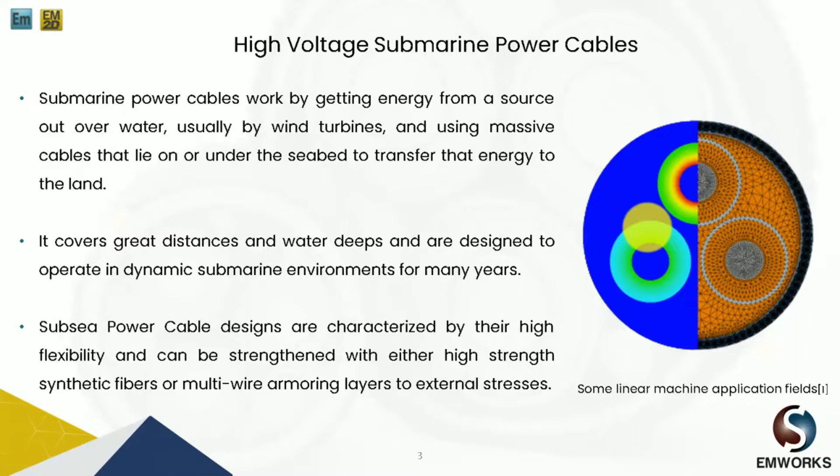Now, naturally, the application for these cables are in areas where there are some offshore activities going on. For example, oil and gas drilling, marine platforms. These cables often act as conduits to supply power to these offshore installations, and after the tsunami there have been a lot of subsea observatories installed by various governments in various parts of the oceans, and so these tsunami pre-warning systems also require electricity, and these subsea cables often carry the electricity from a nearby island.

Now, before looking at the design challenges, let us look at the structure of a subsea power cable. For example, here on the right I have a cross section of one such commonly used design for these cables. You can see that these conductors are there, in the brown color. They are the ones that carry electricity. Then these conductors are covered with lead sheath. As you can see on the screen here, these lead sheaths are basically there to block the electric field from leaving the sheet. Then we also have twisted outer armor, which is here on the outer body, which provides mechanical strength, and all of these are packaged inside XLPE, which acts as an excellent electrical insulator. So these are filled here.

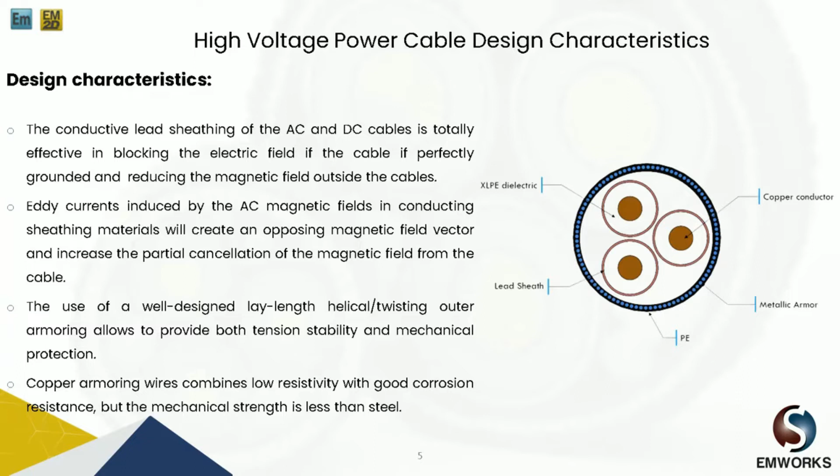So once the simulation was run, let us look at the comparison of capacitance, resistance and inductance. To begin with, we performed a capacitive analysis for a 3-phase power cable, and we calculated its analytical phase capacitance, which is around 0.166 microfarad per kilometer.

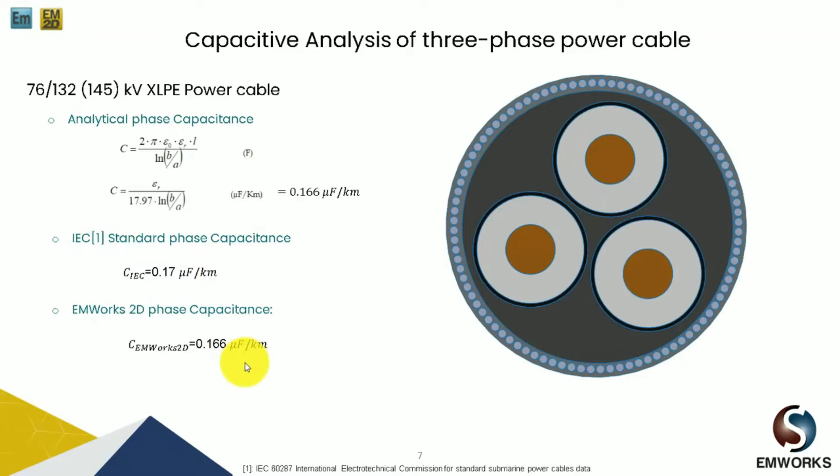We also referred to the IEC standard, and as you can see, for the software EMWorks 2D, we got around 0.166 microfarad per kilometer. Notice that the capacitance calculation coming from the simulation of the cable design conforms very well with the IEC standard.

Moving ahead, similarly we performed an inductance analysis for the 3-phase power cable. Analytically we got 0.4 millihenry per kilometer, and using our software EMWorks 2D we obtained 0.48 millihenry per kilometer, and also using another tool, that is EMS 3D, we achieved 0.43 millihenry per kilometer. Similarly, as per the IEC standard, our results are closely matched, which is around 0.41 millihenry per kilometer.

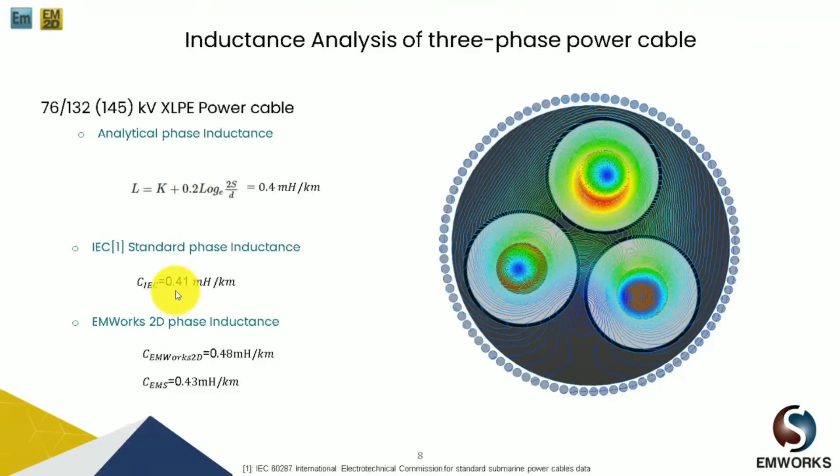Same goes for the resistance calculation. We performed DC resistance analysis of the 3-phase power cable analytically, based on the IEC standard, and using both our EMWorks 2D and EMS tools. The degree of error is small in this computation, so we can conclude with a lot of confidence that simulation can be adopted for finding out the capacitance, inductance and resistance of these cable designs.

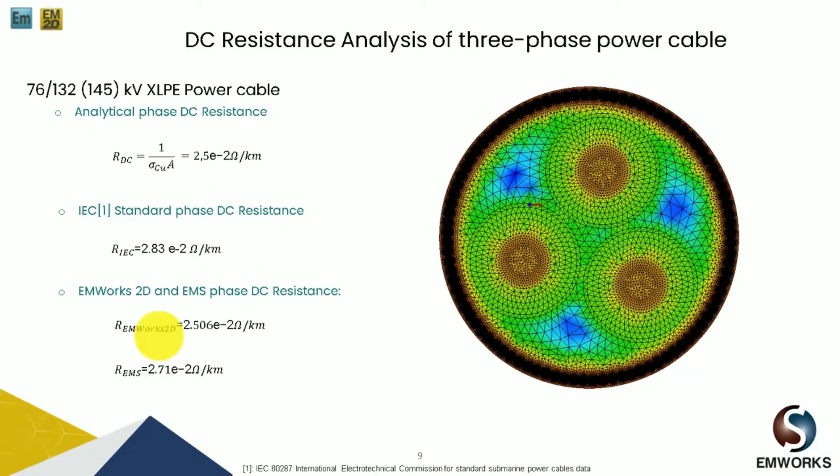And as a result, when you have a new design of the cable done using a computer, we can use finite element analysis to compute its performance, namely its capacitance, inductance and resistance.

Moving ahead, let us look at the simulation results when it comes to electric field and breakdown voltage. Now you have noticed here that all these metallic sheaths are grounded, and the conductors are kept at their respective electric potential. Now there is going to be an electric field in the dielectric or insulator XLPE, and that electric field must be within the breakdown voltage at all operating values of the voltage.

Now EMS electrical simulation helps you to understand the electric field distribution and the breakdown voltage. In the design of this cable, the lead sheaths are properly grounded, and as a result, the electric field is confined inside the lead sheath. The lead sheaths actually act as a Faraday cage, as you can see here on the image, and the XLPE is chosen in such a way that its breakdown voltage is much higher than the electric field that is achieved inside the lead sheath.

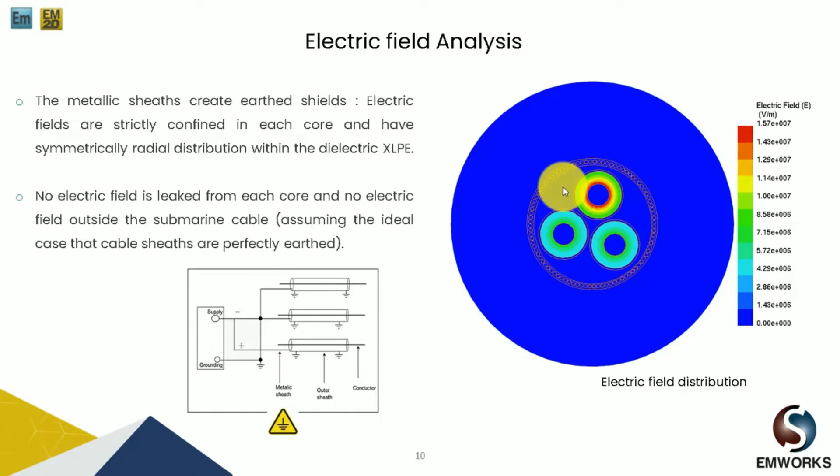Electrical breakdown or dielectric breakdown is a process that occurs when an electrical insulating material, when subjected to a high enough voltage, suddenly becomes an electrical conductor and electric current flows through it. Insulating materials undergo breakdown when the electric field caused by an applied voltage exceeds the material's dielectric strength.

The voltage at which a given insulating object becomes conductive is called its breakdown voltage, and it depends on its size and shape. Cables are likely to fail in operation due to disruptive breakdown. If the dielectric used is defective, a puncture may occur and the cable may fail. Normally, such defects are detected in laboratory tests and eliminated at the time of manufacturing. Failure of cables due to breakdown or puncture of the dielectric is usually very rare.

Here you can see the electric field distribution in a cable, and we can also compute the electric safety factor using the EMWorks tool.

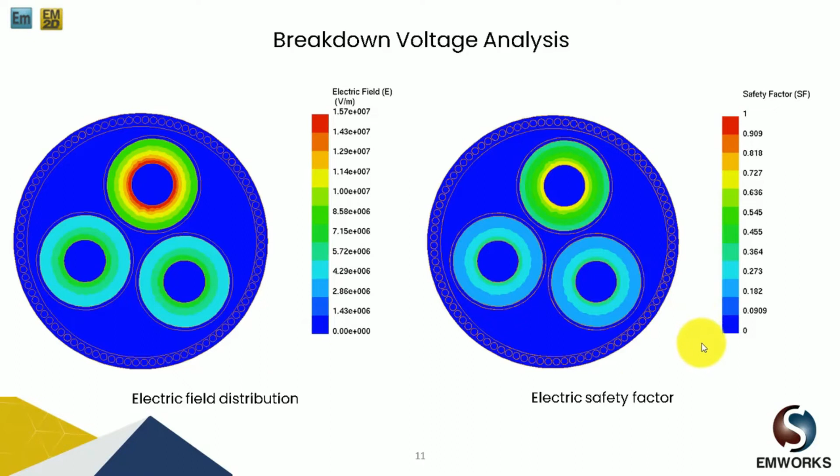Next, we will focus our attention on a section of this cable. We will particularly look at loss analysis, where all the losses happen in the high power cable. Obviously, in the conductors that carry the current, there are I2R or copper losses. There are also eddy current losses in the lead sheath because the current being carried is alternating current. There will be losses in the armor based on the material of the armor.

If the material is copper, then there are going to be very little eddy current losses, whereas if the material is steel, then there is going to be core loss occurring in the steel. Finally, there is also going to be a dielectric loss in the dielectric medium, which we will ignore in this session. All these losses will lead to a rise in temperature in the coil, and the idea is really to understand the temperature distribution in the coil.

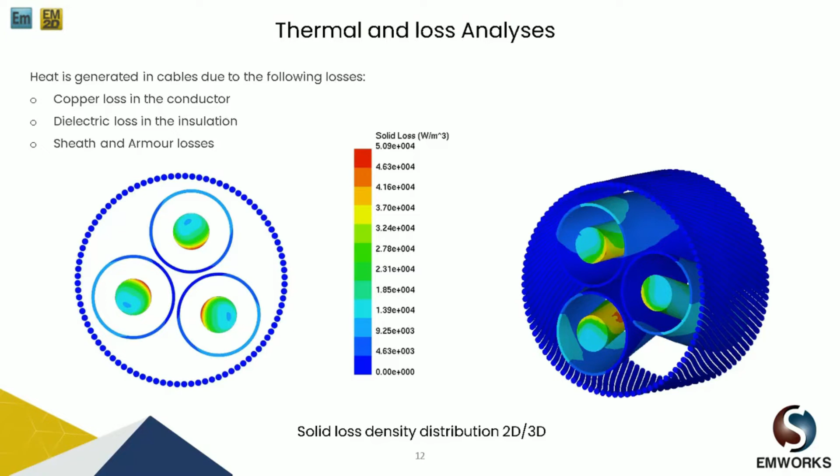So next, let us look at the effect of armor material on the total losses. As I mentioned earlier, we have a choice of the material which is used to create the armor. For this example, we have used an armor permeability of 1 and of 300. We can use copper or aluminum, they are excellent conductors. Or we can use steel, which is not a very good conductor, but it has some permeability. And let us inspect what losses we get.

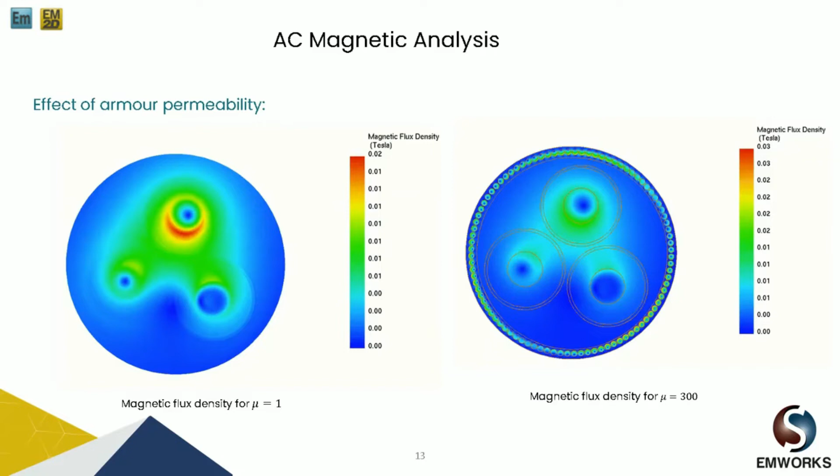When I use copper or aluminum, I get very little losses in terms of the armor loss, versus if I use steel, I have losses that are almost 17 or 18 times more per unit length. So the conclusion here is that the steel armor results in higher losses, but it is still preferred. And it is preferred because of the mechanical properties and mechanical strength that steel offers.

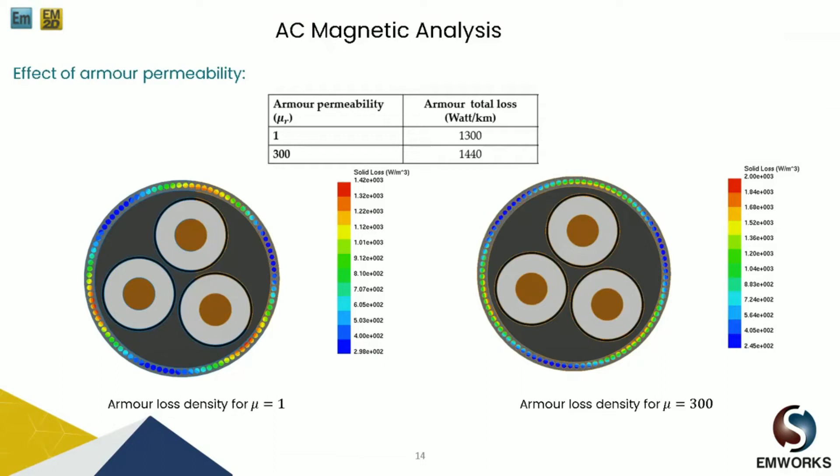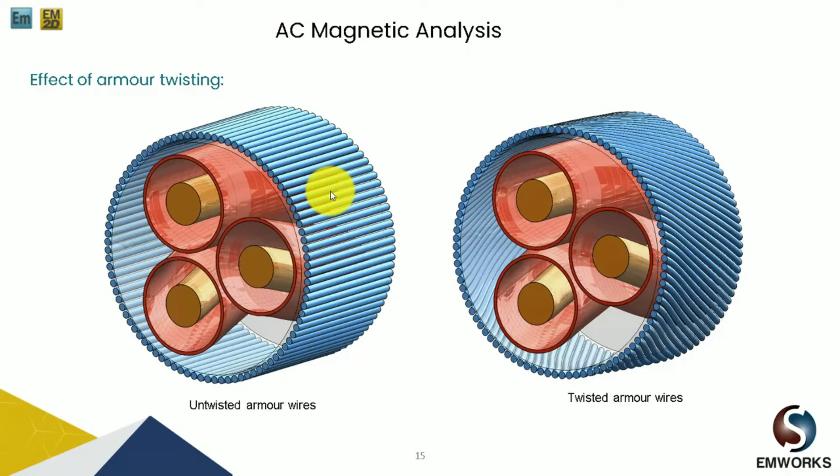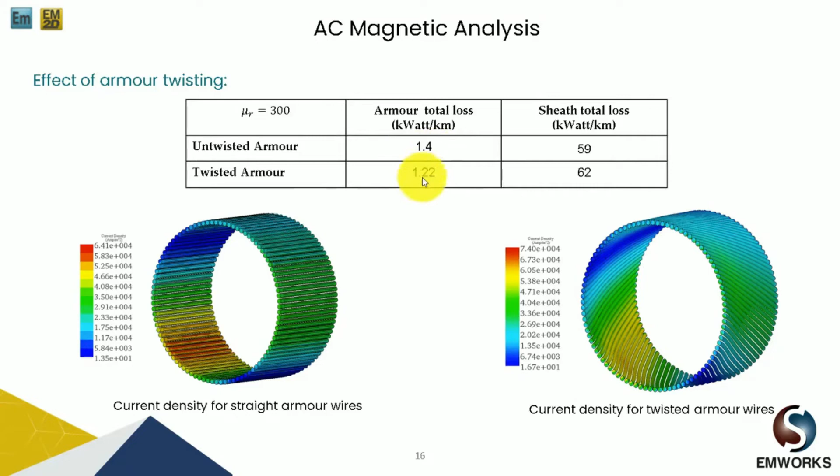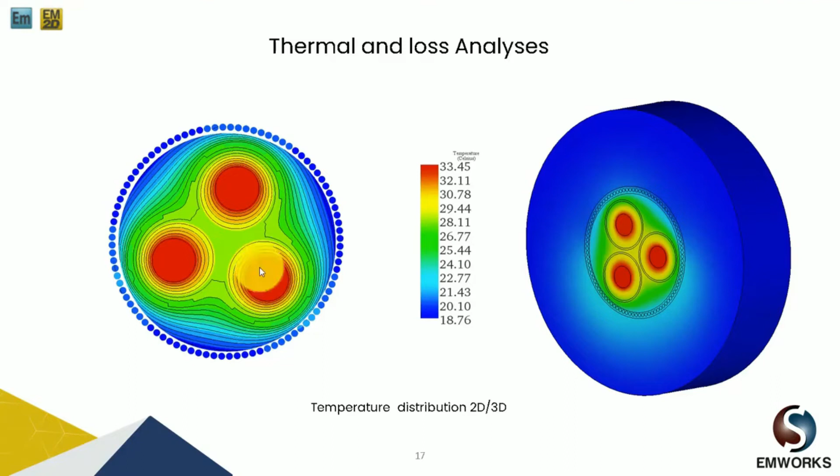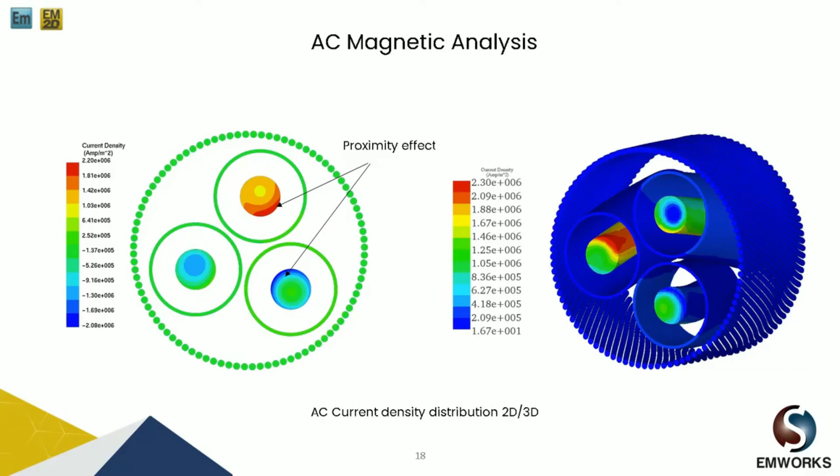Next, I'll be showing you a 3D simulation of the XLPE twisted cable and some of the objectives. We are interested in computing the armor loss. We are also interested in computing the eddy losses in the sheath. Finally, we would like to understand the magnetic field distribution and observe the skin and proximity effects in the copper and the lead sheaths, as you can see here. So now I'll be using EMS 3D for a quick demonstration of the points mentioned in the previous slide.

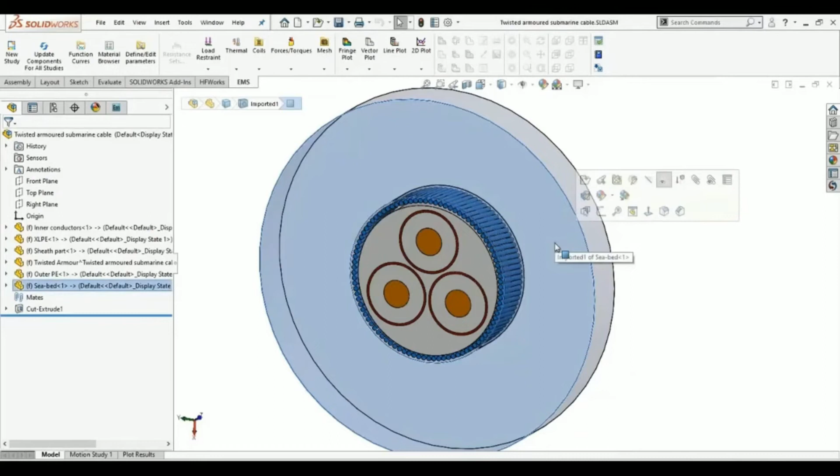Now I have a twisted cable 3D model inside SolidWorks. You can see the outer region represents the seabed, and then there is this cable. Contrary to the 2D simulation that we saw, we have a definite length of the cable. So we are going to do a 3D simulation on this cable using EMS for SolidWorks. EMS for SolidWorks, just like EMWorks 2D, is an add-in product, and the simulation can be accessed right inside SolidWorks.

The first step is to create a study. Here we have created what is called an AC magnetic simulation. In the AC magnetic simulation, it is mandatory to specify the frequency with which the current is carried by the copper conductors. Also, the AC magnetic simulation can be coupled with a thermal conduction solver to give you the temperature distribution, as we did in the 2D simulation. We must specify materials for the various components. The three inner conductors are made up of copper.

Then the outer layer, made up of cellular polyethylene, is where the twisted armor is situated. The dielectric is made up of XLPE, and here is the twisted armor material made up of steel, and the sheath is made up of lead.

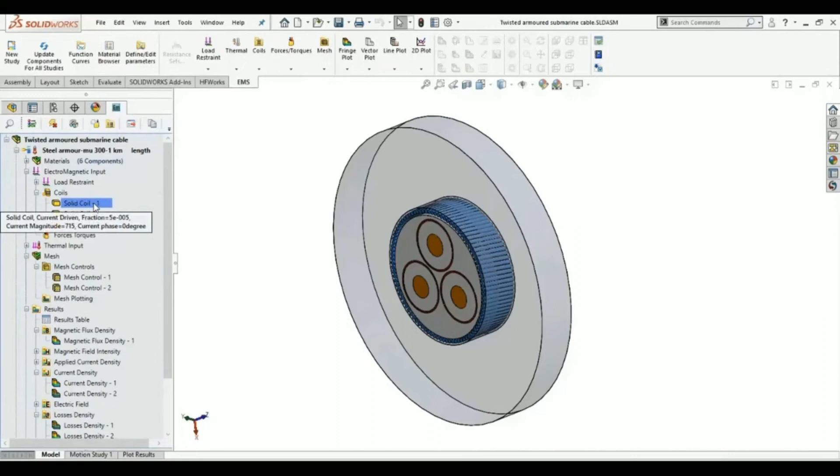Once the materials are defined, we can use the definition of coil to tell the program how the current is carried by these conductors, and they are done with the help of what is called a solid coil. Here the conductor carries a current, and you can see the current enters on the left, and then current leaves the model on the right side as denoted by the arrows. Once you define the current, then you need to go ahead and specify the RMS value of the current, and then also specify the phase angle.

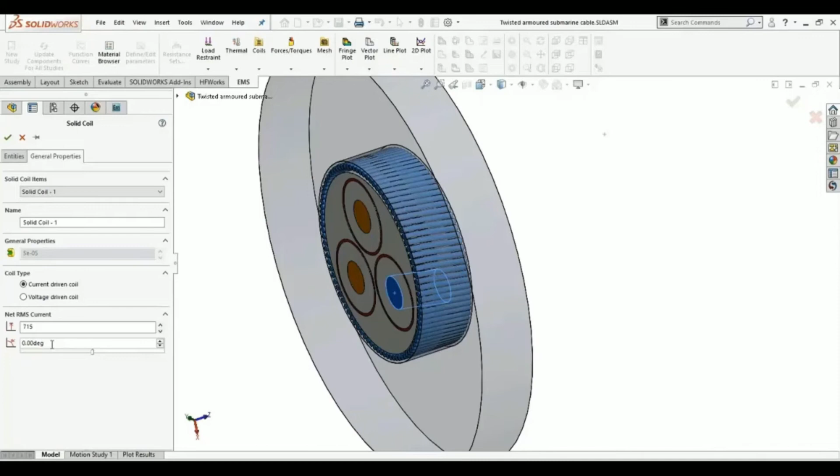Now, because we have three conductors carrying current at three different phases, you can now specify the phase shift between the conductors. So it will be 0, 120 degrees and 240 degrees for the three phase conductors. So similarly, I have defined coils for the second and third conductors.

Now let us look at some of the results. Prior to this webinar I have run the simulation, so we can jump straight into the results. Now a lot of these results are packaged into the results table. For example, you can calculate the inductance, the self and the mutual inductance for all the conductors. Also, the impedance is calculated.

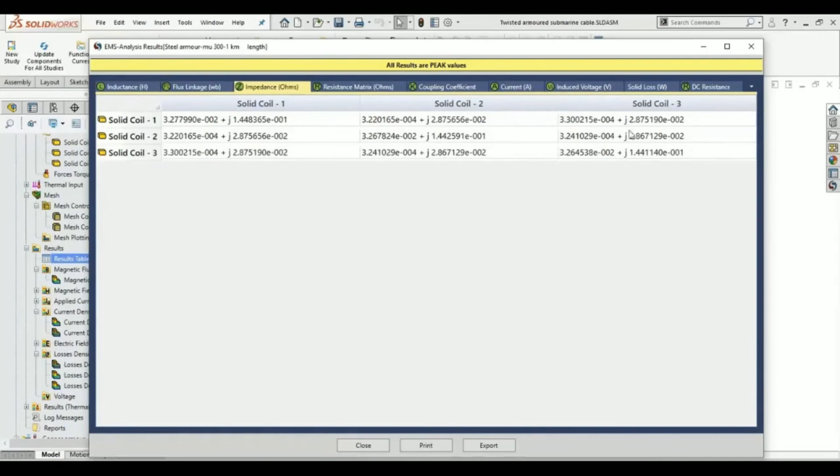Finally, one can look at all the losses. For example, these are the solid losses, I squared R copper losses occurring in the conductor. Similarly, you can see the losses in the lead sheath which can be added, and all the losses that occur in the twisted armor are also produced in this table.

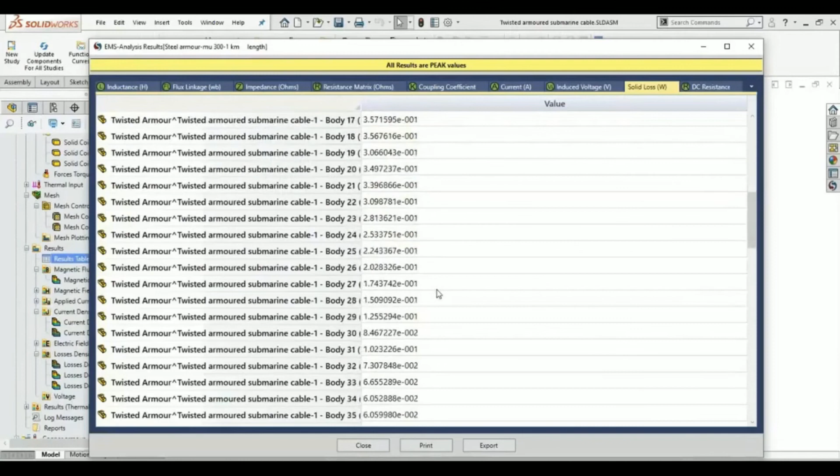EMS is a 3D finite element software, and hence it has some powerful visualization in 3D. For example, users can visualize the magnetic flux density. Here is a plot of the magnetic flux density in and around the cable. Notice that the steel armor provides an excellent shield to the magnetic flux density, and as a result, you can be assured that the flux density does not escape the cable.

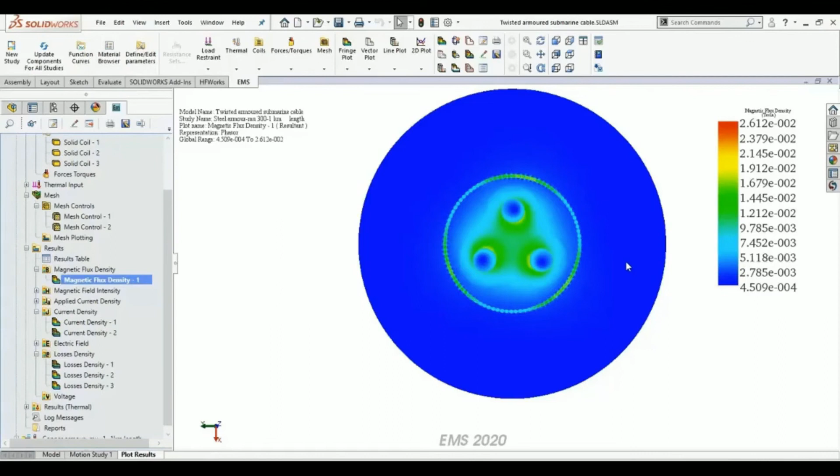Next, we can look at the current density. Here I have the 3 cables and the lead sheath, and you notice the current passing through these cables, and you can also see both the skin effect as well as the proximity effect in the distribution of current.

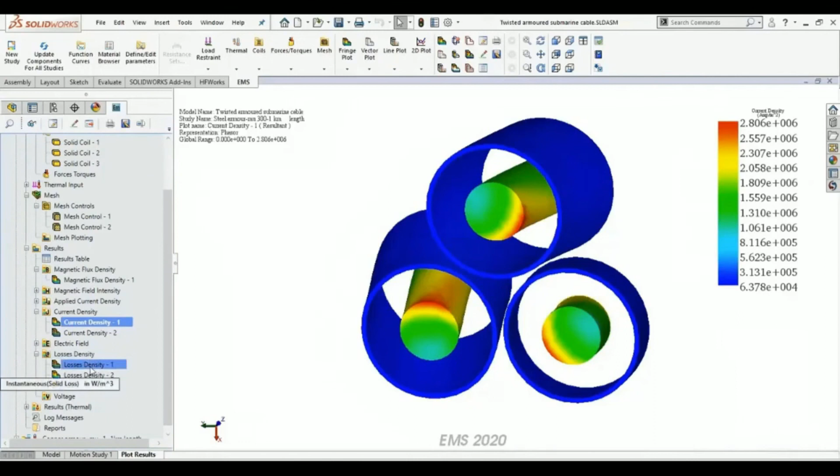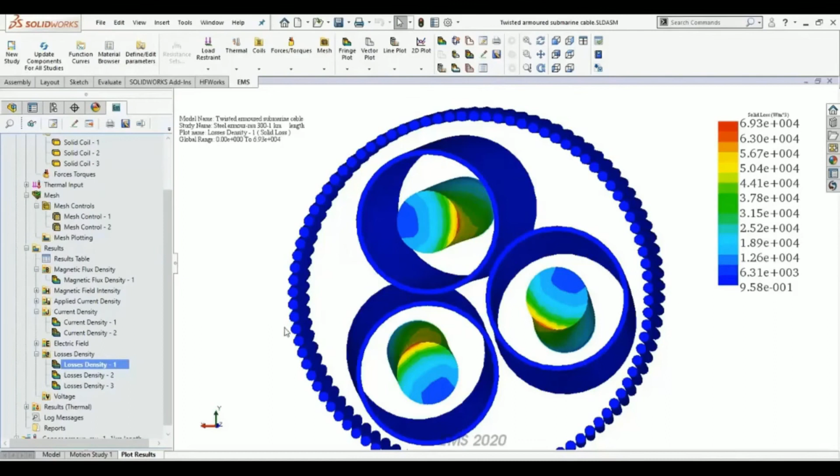You can now see the losses through all the potential components, the conductors, the lead sheath, and the twisted armor. Notice that the blue is a low value of these losses. Now I can isolate them. For example, I can just observe the losses in the twisted armor and the losses in this lead sheath specifically.

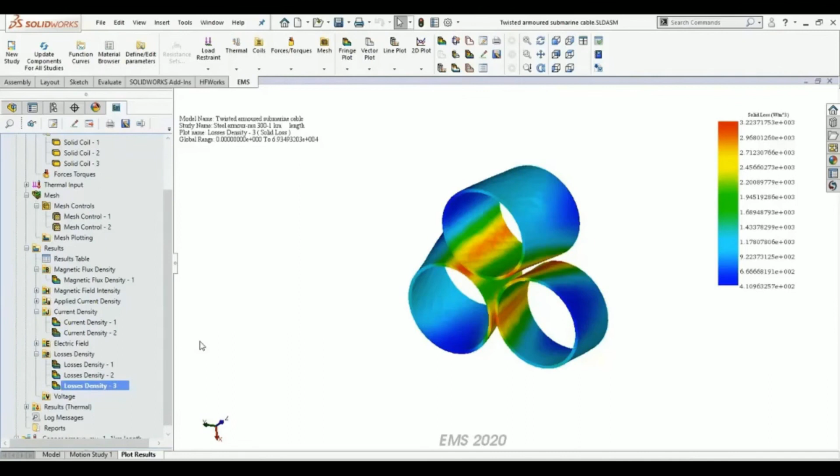So we just saw how EMS can help you to simulate these cables and find a lot of interesting and valid information that is required for an engineer who designs these cables. Now, to conclude this technical presentation, we saw how EMWorks products, namely EMWorks 2D and EMS 3D, can be used to study the performance of the cable.

We saw how we were able to calculate the capacitance, inductance and resistance of the cable. Then we studied the electric field distribution inside the cable and also studied if there was indeed any breakdown. And for the design that we investigated, we found that for the operating conditions there was no breakdown.

Next, we went to EMS 3D and we studied a particular length of the cable as a 3D model. This allowed us to calculate things like magnetic flux distribution in and around the cable. We were able to visualize and quantify the losses occurring within the cable per unit length. And we could do a thermal simulation to look at the temperature distribution.

All these simulations were carried out right inside SolidWorks, and there was no export or import of 3D geometry, and as a result, users of EMS have a very short learning curve to do magnetic and electric simulation.